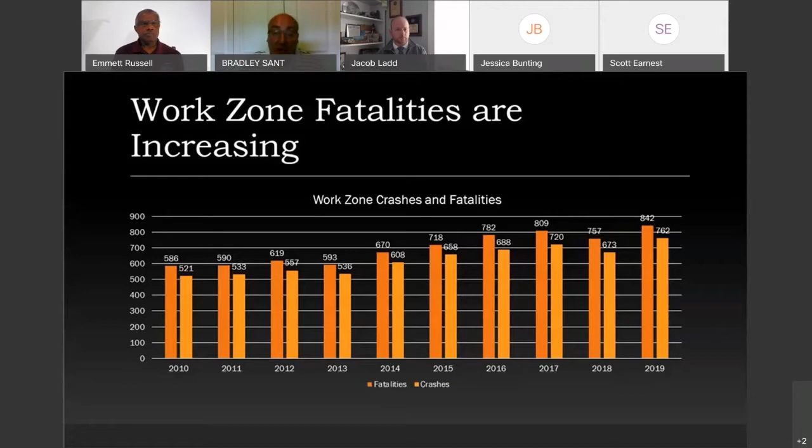Now, these are motorists, passengers, and workers, and others who may be pedestrians near the side of the road. So this includes not just worker fatalities, but anyone who dies in work zones. And again, we consider probably all of these, whether they're work-related or not, as struck-by incidents or incidents involving a vehicle or people crashing. And so it all ties into why we're doing this.

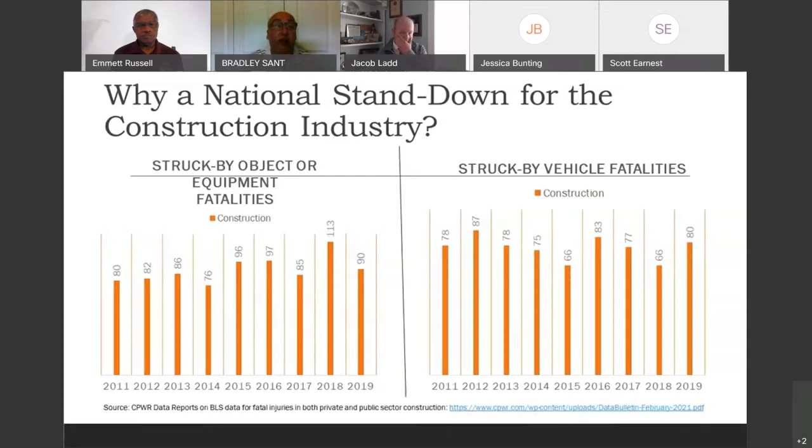When we look at the struck-by vehicle fatalities, again, pretty much up and down, but in more latter years, a slight upward creep. So we've got to really pay attention to this. Again, struck-by injuries are the number one cause of injury in construction, and struck-by fatalities are number two, but it depends on your industry too. We'll talk a little bit more about that in a minute.

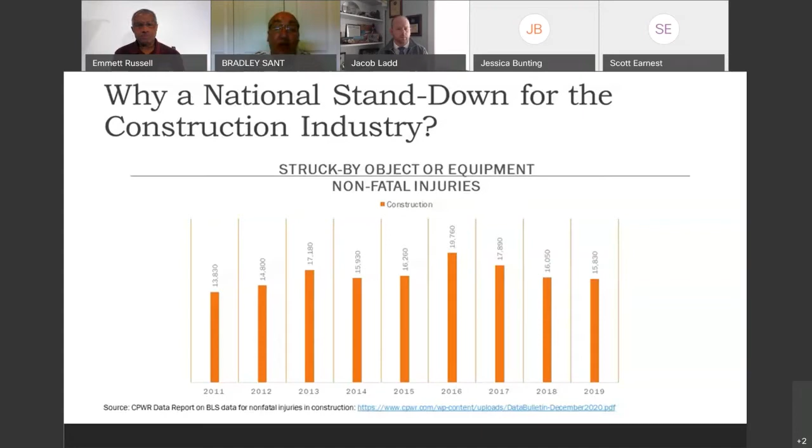When we talk about struck by an object and equipment for the non-fatal injuries, again, we peaked in 2016. We had a nice downward trend, and we're still just barely moving downward. So that's a good thing that our injuries are down. But again, don't let the word injuries make you think it's someone who gets a little bit hurt and they're better. Many of these injuries last a lifetime and end careers. A significant problem continues with nearly 16,000 injuries in the construction sector alone.

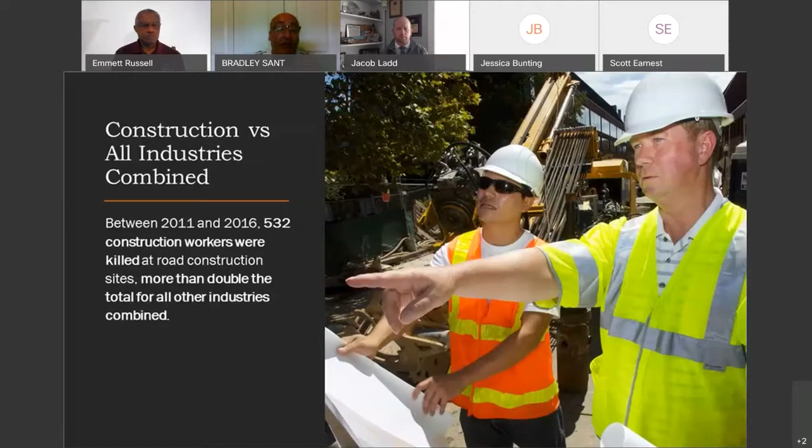So we look at construction versus all industries. Between 2011 and 2016, 532 construction workers were killed at road construction sites, and that's more than double for all other industries. So again, we have a significant issue in the heavy and civil segment of the construction industry, and the highway, bridge, and street sector has the highest numbers of fatalities. So when it comes to struck-by fatalities, the heavy and civil industry is our biggest worry for fatalities because they're usually being hit by cars intruding into the work zone or construction equipment.

If we look at struck-bys from other types of incidents, just as far as the highest number of injuries, again, we can look at some other sectors like plumbing, heating, air conditioning, and masonry.

So what happened during the pandemic, and again, in the work zone? Big problems, because we saw that during the spring of 2020, just a year ago, travel on America's roadways dropped by 40%. That should have been really good news. As we saw less traffic volume, we would expect less struck-bys and less fatalities. However, what we had was a convolution of problems here, because as the vehicle miles traveled dropped, as we drove less, state departments of transportation, roadway owners saw it as a great opportunity to advance construction work and get projects done while there was less traffic, hoping that less traffic meant less exposure and we could get more work done.

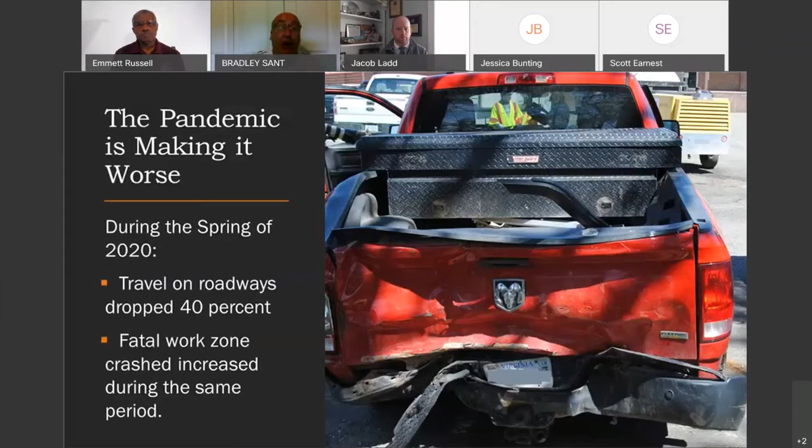But what we actually saw was fatal work zone fatalities increased during that period, and we're asking ourselves why. Well, as the roads emptied, speeds went up. A study done in the Washington D.C. area reported that some areas were clocked at over 130 miles per hour. There's an article in the Washington Post. Now, mind you, I don't know if this is in the wider D.C. area or within D.C. itself, but inside the District of Columbia, there's no posted speed limit higher than 45 miles per hour. And so we saw deaths both by workers and motorists and their passengers increase, even as our traffic decreased.

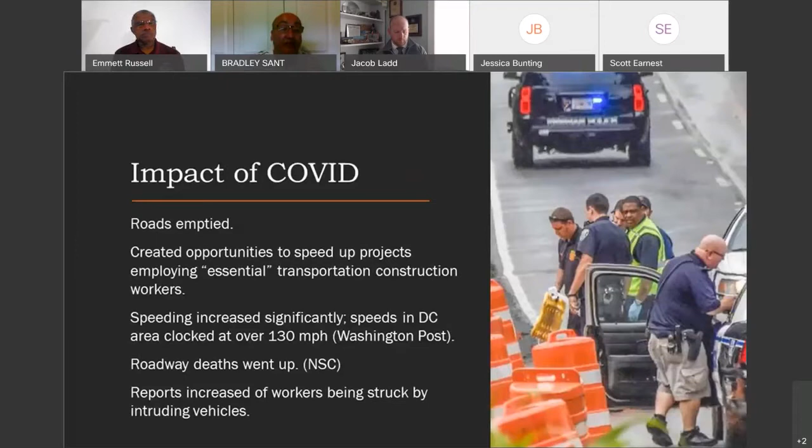So one thing we're still working on and will continue to work on with struck-by incidents in the work zone is that we really need to get the National Highway Traffic Safety Administration, the Department of Transportation agency that does all the work zone reporting, to correlate better with the Bureau of Labor Statistics, because their systems don't match up. As a matter of fact, NHTSA classifies any person outside of a vehicle—according to NHTSA data, you're either a driver, a passenger, or a pedestrian. So they lump all the workers who may be struck in as pedestrians. That's a problem, especially when we're talking with the agency about how to get fewer pedestrian fatalities—they're not thinking about workers.

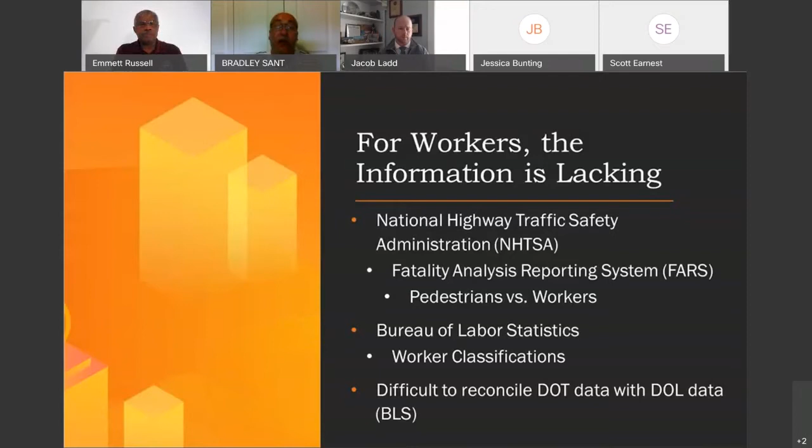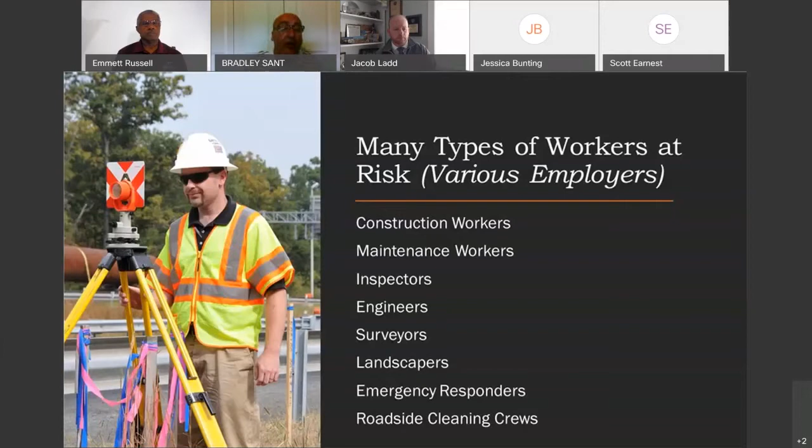And again, with the Bureau of Labor Statistics, they are only tracking workers there, but sometimes the way they group workers is problematic and we're missing data. Because if we're just thinking of your traditional highway worker, we're probably capturing the laborers, operators, people you anticipate being there doing construction work. But our industry is much bigger than that. The BLS data, if you run a simple analysis, you're not going to capture inspectors, engineers, surveyors, cleaning crews, or people installing signs. All those are missed in the BLS just doing a simple search, and you can't really separate those categories to get just transportation construction and sign installers versus others. So it's really hard to know exactly how many are killed, and we're working to do that.

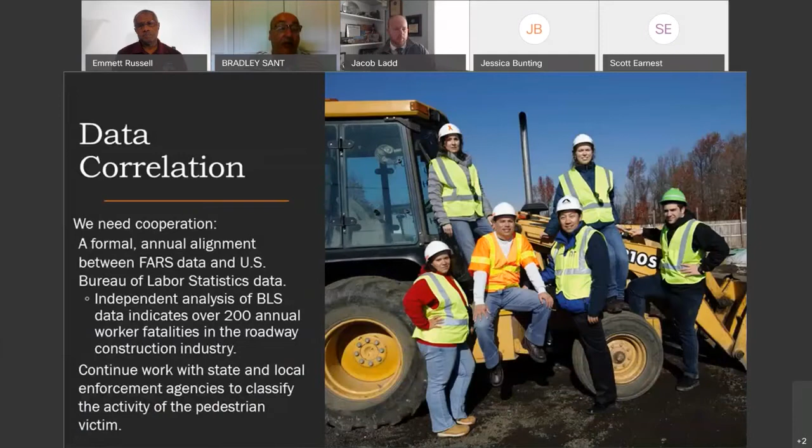So one of our efforts going on right now is to get better correlation and better data, getting NHTSA and BLS to work together and continue that work. And why is that important?

Well, it's because in the heavy and civil industry, struck-by is our number one cause of fatalities. In most construction, and next week we're doing our national stand-down on falls, critically important because that's the number one cause of death in construction in general. But in heavy and civil, it's not falls, that's number two. Number one cause is struck-by. So it's a big issue for this segment.

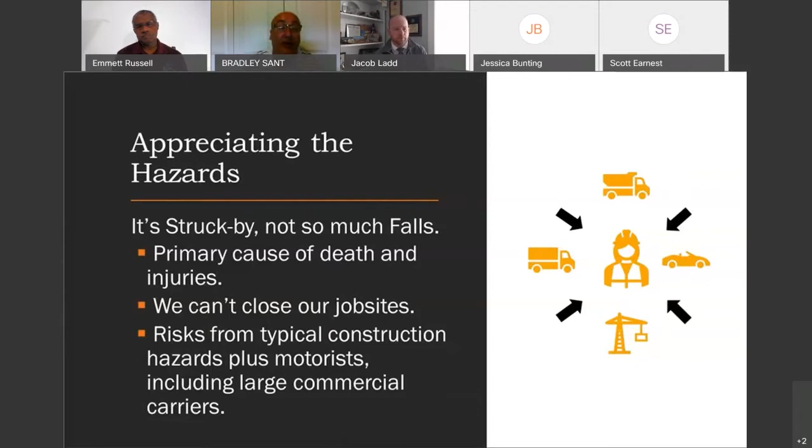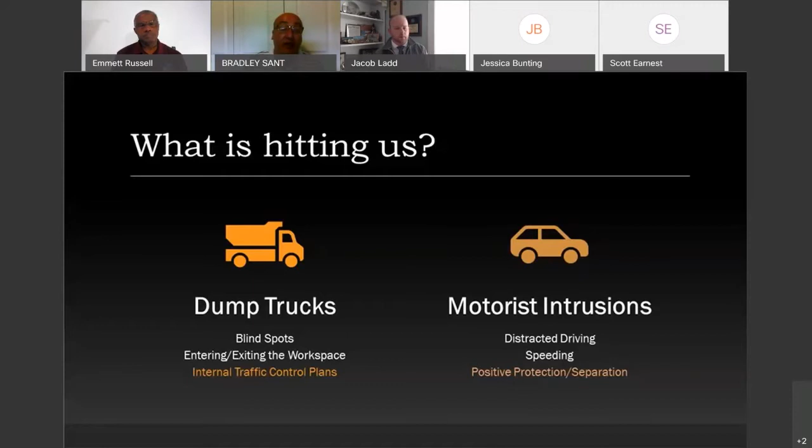And who is doing it? Well, there's a lot of causes, but if it's us running over our own workers, likely it's dump trucks, big blind spots, motorist intrusions coming in, distracted drivers, speeding, and fatigue. You're going to hear a little bit about that from Kevin and the other presenters. So again, we're going to talk about proper traffic control, internal traffic control, looking at both inside and outside the work area to prevent those work zone fatalities and accidents.

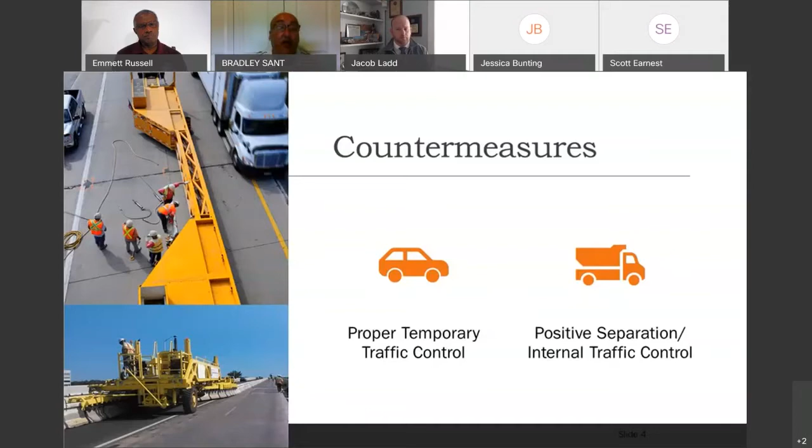So let's turn it over to Kevin at Granite, who's going to talk to us about some instances that they've suffered and have been dealing with since November of last year. Take it away, Kevin.

Thank you, Brad, and good afternoon everyone. My name is Kevin Carnahan. I'm the Regional Safety Manager with Granite Construction Company, in the South Coast region of California. If you're familiar with Southern California, I'm in the San Diego, Orange County, LA area.

Just would like to start out by saying thank you to Brad and ARTBA for allowing us to share this unfortunate incident with the group. Overall, our intention is to share details of the incident we experienced in November with hopes of driving overall awareness of work zone intrusions and struck-by incidents within the construction industry.

So for those of you that don't know, Granite Construction's usual type of work consists of asphalt and concrete paving, dirt work, underground utilities, structural concrete, a lot of times with materials that we mine and size in our aggregate mining facilities. So this project that we were on was no different than really the hundreds we've been on before. On the night of November 18th, 2020, this is really what we were up against.

This was the project scope: a $10 million project with Caltrans. We had a rubberized hot mix asphalt paving project with electrical work, landscaping, concrete, flat work improvements. We were going to be doing both the eastbound and westbound lanes for asphalt paving during the night shift from 9 p.m. to 5 a.m. We were provided single lane freeway closures with on and off ramp closures. So really kind of our run-of-the-mill asphalt paving project.

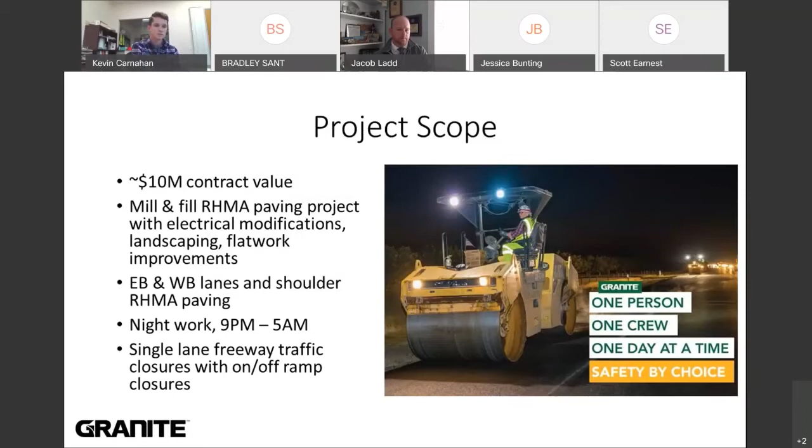So it's November 18th, 2020, end of last year, about 12:05 a.m. I got a phone call. I was sleeping at the time, and as a safety manager, you get these calls. Sometimes they're unfortunate calls, sometimes it's a good call. At this time, it was not a good call.

After multiple attempts of chest compressions and other EMS services, Emilio was pronounced deceased about 30 minutes after the impact.

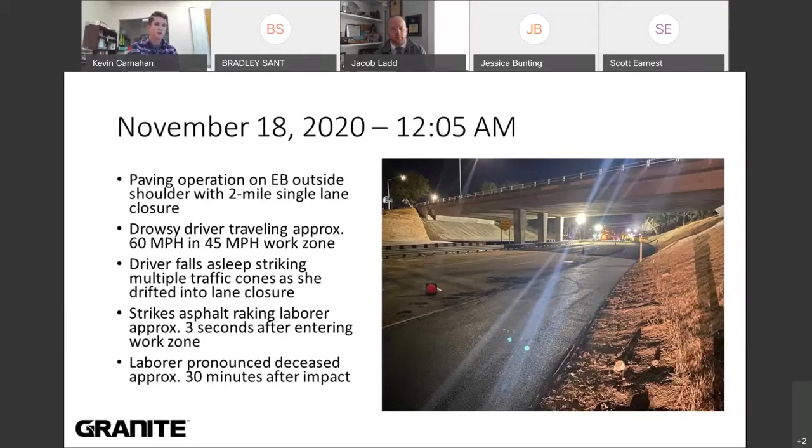So here you can see a general layout of our project site. If you've ever driven in the San Diego or Los Angeles area, you understand that the freeway system is pretty complex, very fast moving, with a lot of very aggressive drivers that do like to disregard sometimes the traffic laws. So that's exactly what we saw here. This project is located on eastbound Highway 94 in Spring Valley, California. If you're familiar with San Diego, that's East County, San Diego. Very complex freeway system with a lot of speeding vehicles.

As you can see in the diagram, our asphalt paving spread and our lane closure that we had set up were all per specification, and overall production was very high the night that Emilio got struck.

You can see the curvature of the road here, and that white line kind of towards the center of the screen shows the travel path of the fatigued driver. Right underneath the Avocado Boulevard overcrossing is where it's believed she fell asleep, then followed a similar straight path, just missing our initial breakdown compaction asphalt roller by about 2 feet, before striking Emilio right on the edge of the shoulder we were paving. He was actually about 10 feet inside of the cone line when he was struck.

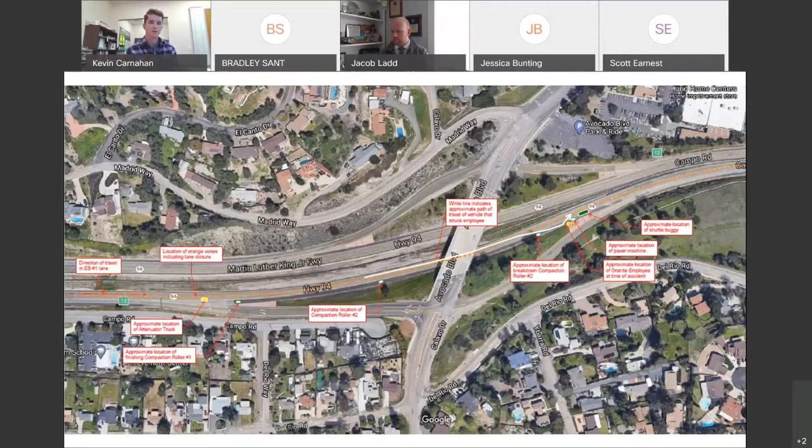I wanted to share some photos of this, obviously a super tragic incident that we went through. Part of this is the incident investigation that has to happen afterward to find out who, what, when, where, why, and what we need to do moving forward.

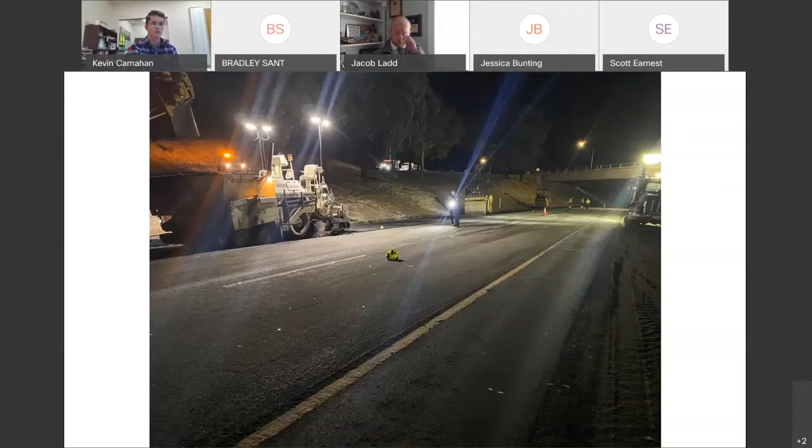Some more photos here give a general perspective of the job, but the fatigued driver that struck Emilio just missed this breakdown roller, seen here towards the center of the screen, by about 2 feet. One or two seconds difference and this incident could have been completely different, for better or for worse. It could have possibly resulted in injury to the driver, or more injury or possibly more death to the rest of our paving crew out there. There's about 10 guys behind that paver at one time.

This incident investigation lasted a while, as you can imagine, and this shows really the severity of the damage to the two-door vehicle that struck Emilio. The overall incident investigation lasted for about 10 hours, going well into daylight hours, as you see here.

Employees were interviewed and counseled, and hundreds, if not thousands, of pictures were taken, as well as 3D imaging on the job site. The small two-door vehicle that struck Emilio is seen here with the large hole in the windshield, where Emilio's head went through when he was struck. You can see the impact his body caused on that vehicle. The vehicle was totaled, and the driver ended up walking away not injured whatsoever.

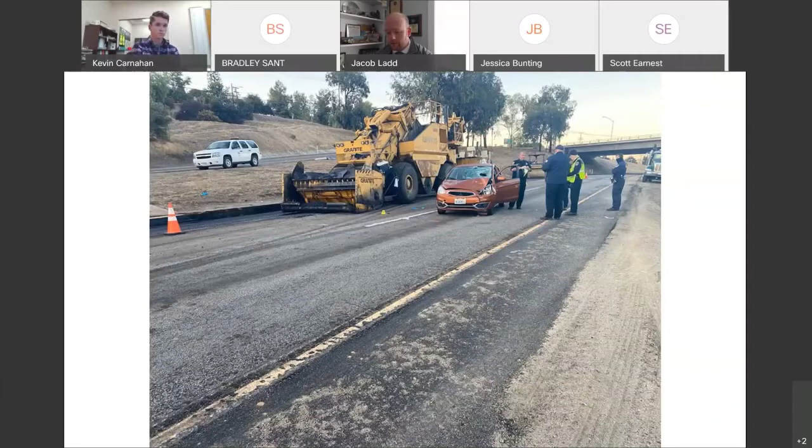Here's more or less a back view of the incident. Emilio ended up landing next to our shuttle buggy, that machine kind of on the top left with the conveyor. He was struck well before that, and you can actually see his asphalt rake next to the shuttle buggy. All of that material displaced all over the place can really tell you the severity of that impact and what our paving crew saw with their own eyes.

They saw their friend get struck and hit, and chest compressions and multiple types of emergency medical services tried to perform on Emilio, but it was not successful.

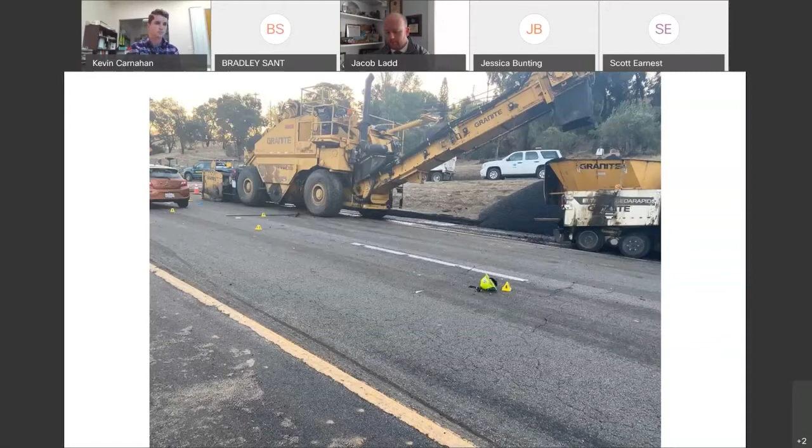So what do you take away from an incident like this? That's what our team was asking ourselves the day of the incident, and everybody was just in shock. Nobody could believe this happened to their friend, their coworker. This was my first fatality dealing within the safety profession, and it's a big deal. It's huge.

But what can my team and what can your team do to prevent incidents like this from happening? This is just scratching the surface, but something I thought was worth sharing. The unchanging fact about our work in heavy civil construction is that working around live traffic is extremely dangerous, no matter how many years of experience you have.

There are many tools and methods to help prevent work zone intrusion, and that's part of what I want to go over here. First, you really need to look at your overall exposure to live traffic and your traffic control setup. Is the MUTCD enough, what you have? Just because you have something per spec doesn't mean it's enough. So are you meeting the MUTCD traffic control standard, or can you go above and beyond that standard to protect your people? Next, you're looking at your highway patrol support.

On a lot of these freeway jobs that we do, a lot of these active highway jobs, we do get the luxury of having highway patrol out on the job, at least stationed there. What you're really looking for is active enforcement of these highway patrolmen that are out there.

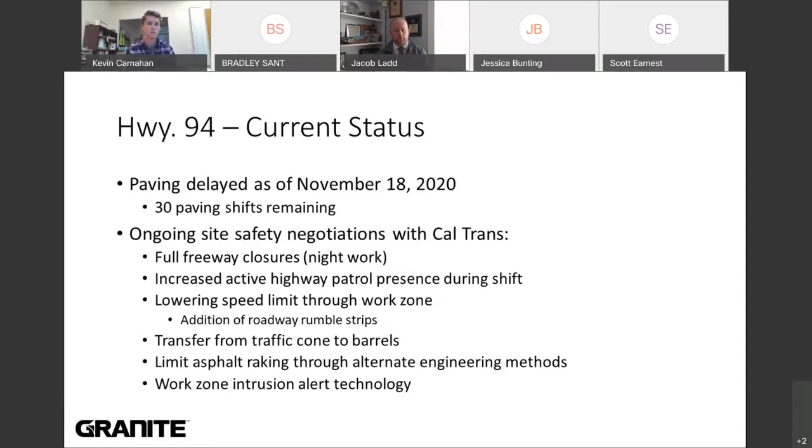So Caltrans ultimately agreed to allowing full freeway closures on this project, with up to 4 highway patrolmen actively enforcing the work zone. Cars will be directed off of the freeway into nearby county roads, as we basically have the entire freeway closed to traffic to do our work. This really was the ideal option for Granite in terms of safety and production purposes.

So it's worth noting the business impacts that this fatality has. First and foremost, the loss of life is incredibly difficult to deal with on a professional and personal level. The loss of life has to be dealt with great care and respect.

The additional business costs we've seen with this - just the night of the incident, nearly $150,000 in cost impact from the fatality due to production and investigation costs, and over $500,000 initially paid out in workers' compensation death benefits to Emilio's family. Legal costs are still to be determined at this time. Given the impact and the loss of life here, it is really important that the numbers don't take the lead in something like this. But ultimately, like I said, we're all here to run a profitable, safe business. So we thought understanding the business element is something necessary to share here.

I just wanted to say thank you to ARTBA and Brad Sant specifically for recognizing this important issue and the need for awareness within all of our work zones, within work zone intrusions and struck-by incidents. If anybody has any questions or would like to follow up with me specifically, please feel free to reach out to me or Brad Sant. Thank you very much.

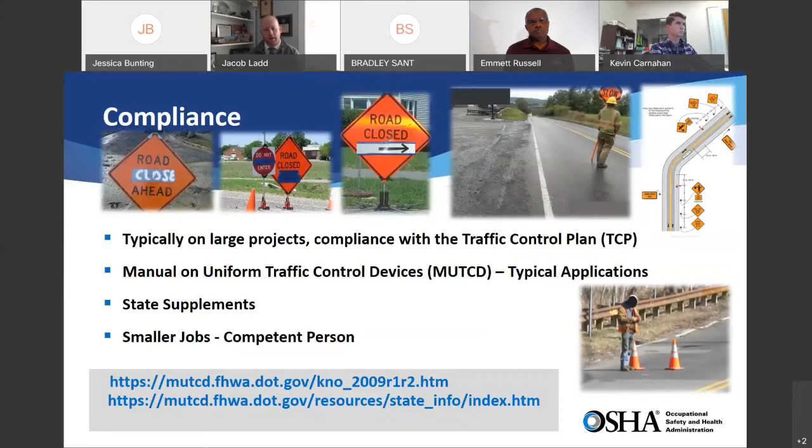In conjunction with state supplements to accomplish their traffic control planning. And on smaller jobs, a lot of times it comes down to the experience and knowledge of the competent person, and also their exposure, their frame of mind, and their ability to make decisions within the company, or how they feel about their ability to make those decisions.

So there's some challenges to compliance. Traffic management is generally the major concern of larger projects. On federal or state-funded big highway projects, a lot of time is spent on moving the motorists through the project. Especially in long-term projects, once we have closed off a project and separated it by barrier from the moving motorist on the other side,

There's less thought given to the inside of the work zone. Pedestrian considerations are often lacking as well, and don't include workers. Time and conditions often begin to dictate the operation. So people get behind schedule, or something changes in the schedule and they have to make accommodation to fix that or make up for it. And so that begins to dictate how the operation proceeds - number of workers, delays in schedule, those kinds of things.

There's a lot of use of what people like to term emergency work - we have to get this done right now, immediately. And that changes the plan oftentimes, we see. There's also a reliance on law enforcement and other temporary interruptions. What I mean by that is we find that oftentimes there's a feeling that, oh, I put a law enforcement officer out there and I'm protected. And that's not the case. They do serve as a deterrent and they're helpful, but they're not going to prevent all incidents.

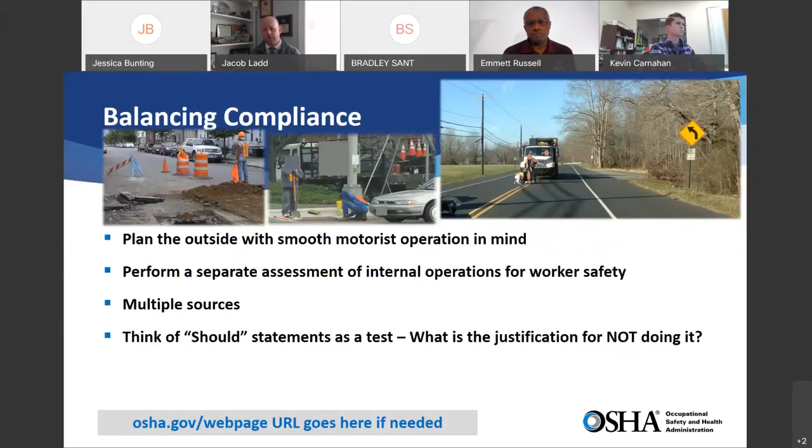I would encourage you to think of it as a test. What is your reason for not doing it? Do you have a good reason for not doing it? It's recommending that you do it for good reason. So if you don't have a good reason for not doing it, maybe you should reconsider whether you should or not.

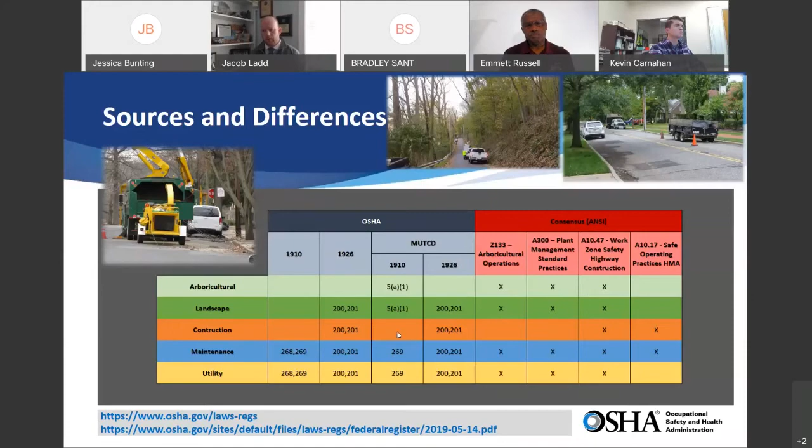And again, it's not a complete list, but it is a good idea of where you can look for compliance assistance.

There are many more shall statements in these documents. Consensus standards will help you plan your job, they will help you think about your job. There's an expanded discussion on hazard analysis, so it makes you think about it in terms of if this, then that. It gives you a process to follow, and it says, well, if there's this condition, maybe consider these 5 things.

And if you work through that and think about, again, like I said, a should - what is your reason for not doing it? That will help you make sure you have reliable protections in place for your workers. And the other thing I would say is don't let that be a hurdle. You may have a situation where you feel you can't do something because of the phase of the construction project. Well, that's okay - is there an alternate way you might be able to do it? These ANSI documents will help you to do that.

And again, there's a focus on job hazard analysis planning and, most importantly, what we see, internal traffic control planning. It's an element that's lacking very often.

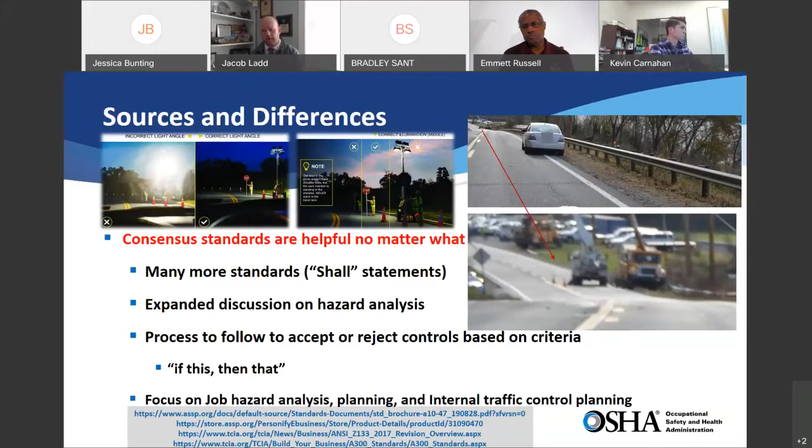Some things to think about when talking about internal traffic controls. Backing - backing is the number one thing you should be thinking about. If it's at all possible, you should ideally come up with a plan that you don't have to back. If you can move people in a forward direction through your project only, that's likely going to result in the least amount of issues between different contractors, foot workers, heavy equipment, and all the other things you might find in a work zone.

Parking is a concern, and it's not only parking of the equipment related to the work zone, but also people who pull in with their personal vehicles. Maybe you have a foreman who bounces around to a couple projects and for whatever reason doesn't take the work truck that night, he takes his own truck. Or even a worker on a smaller job who stops in to do some quick work. Those vehicles are not always equipped the same way as a work truck might be, so they might not have all the reflective striping, the rotating beacon light, and all that. Those are concerns, and without providing an area that's safe to park and access the site, that's what workers will do. Same thing goes with workers who are pedestrians.

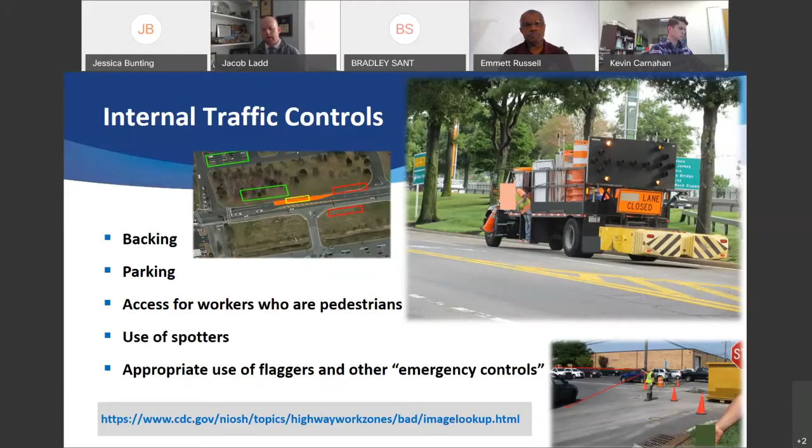Appropriate use of flaggers and other emergency controls - there is a place for both law enforcement and for proper use of flaggers. But we need to make sure we're setting them up correctly. Flaggers have appropriate equipment and training, they know where they're supposed to be. It's not last minute; they have a flagger station set up appropriately. And if it's truly an emergency situation, there are ways to do that, including law enforcement. But what is thought of as an emergency should be very limited. Many times we'll talk to a company who's quick to say this is emergency work, but we find they've been planning it for a week or longer. So we need to really think about what is truly emergency work.

So I have a couple of examples, and I don't want to go too far into the weeds, but they highlight the point. Here is a rough diagram of an incident that occurred - it was a fatality. What happened here was a paving operation, and as you can see, there was backing that occurred.

Something people may not think about is the person who was struck was actually operating a skid steer, and the window on the skid steer got blocked by dust and whatever else. They pulled over to clean their window, and there wasn't a maintenance area, or any thought given to places where it would be safe for somebody to park, take a break, do maintenance, inspection, or clean things up.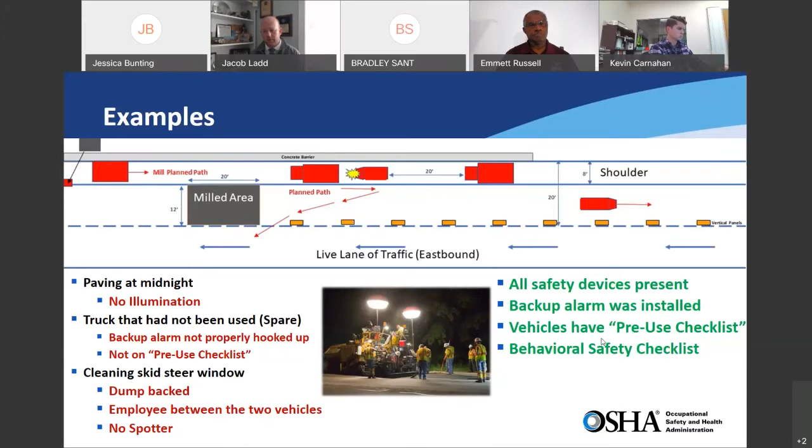The second example is another project on a highway with two companies - one was an inspector, and the other was the site work contractor who had a foreman out there talking to one of his crews. This happened in broad daylight, and there was even a backup camera installed on the vehicle, and there's a video of this that's extremely compelling.

You can see the person operating the vehicle was actually looking around and in their mirrors for whatever reason - distractions going on, whether that's the highway on the side or other equipment moving within the project - and they didn't see the person standing behind them. At some point the inspector had walked behind the truck, and the site contractor's operator backed up and struck the inspector. Some things to think about: there was no internal traffic control plan here.

There was no exit plan, but there was space to. So they're backing the vehicle where it was unnecessary. There wasn't any coordination between the companies. You know, I'm going to be here, I need to do this work today. Okay, we're going to have vehicles in and out at this time. None of that existed. And of course, obviously there was no spotter.

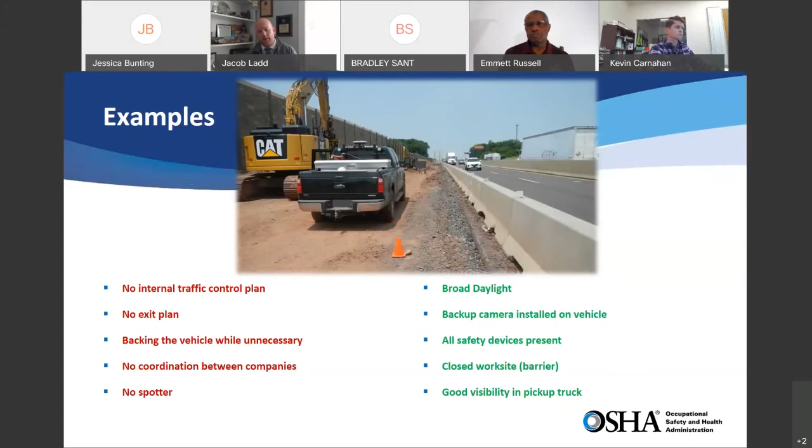And that's all I have.

Thanks so much, Jacob. Really appreciate that. And again, your presentations have elicited a few questions. So let's start this one, and I'll direct this one to you initially, Emmett, but again, anyone feel free to jump in. We've had some questions about the use of spotters. Is it always appropriate to do spotters? Are there times when they're not? Let's talk about spotters as a part of avoiding incidents within the work zone.

In the case of the fatality I described, spotters would not have actually been the solution. We incorporated the worker-free zone where workers were not supposed to be. This was just a pure lack of communication between the two operators. Always remember one thing with spotters. Number one, the spotter has to be trained. And if the spotter's not trained, now you have another body on the job that might be susceptible to an issue or an incident. Secondly, a spotter only really works where you have a lot of backing up, and where you have backing up and hazards, a spotter is very necessary, but a spotter does not necessarily take care of every issue on the job site.

Do either of our other panelists have a thought or position on the thought of using spotters? What about this one, just to expand it? Can a spotter and a flagger be the same person?